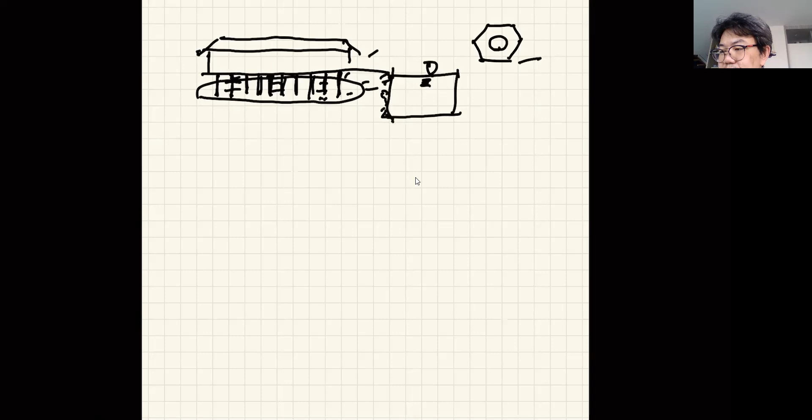But technically, this house will not sit on a solid foundation. It just floats on clay. But this clay has been made strong enough by a series of piles driven into it. I have a house like this. It was built 50, 60 years ago and sits on the shallow foundation, wooden piles like this. And you know what happened? At the back of my house, there used to be a water pond, and this is the soil. When you have a water pond with the soil like this, the water would come in like this. The water level in the ground would be something like this.

And then one day, this is my house, and we have a wall here, the guy who owned this pool decided to make it into a concrete pool. So they made it a solid pool. That means the water level in the ground disappeared. When water goes away, the soil condition here changes. So I have a problem with the house because when the water is gone, the clay here loses its strength. So some of the piles at the back of the house went down. So I got a settlement problem.

Generally, if you have a settlement problem, you can jack up the house and reconstruct your foundation. But this house is so old. In fact, the entire house sits on the shallow foundation, so there's no way to jack it up. It's very funny because we have a structural engineer in the house, and we have a settlement problem that the structural engineer cannot do anything about. So we have to let it rot. This used to be my bedroom with 2 kids, and the settlement is so visible, the doors became stuck, couldn't open because the rotation is so visible. Yet we still lived in it, but now we got a new house, so we're happy.

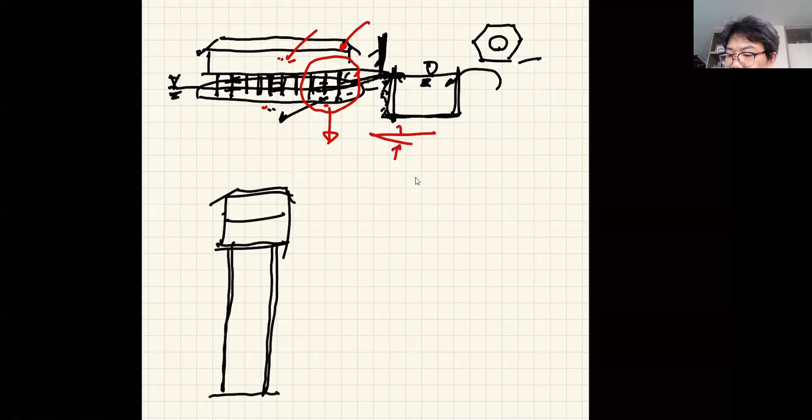Now, in general, for a typical house now in Bangkok, let's make it like a 2-story house, they don't do this anymore because we have the technology. The foundation is a deep foundation nowadays, so that the weight of the house is sent to a more solid datum line. Generally, this is about minus 21 meters from ground level in Bangkok. This is where we find the first solid level that we can drive the pile down to and let the piles sit on this solid ground.

I don't know what it's called because I'm not the soil mechanics guy. Never was, never am, never will be.

But this is what we do nowadays. So it's a completely different animal. Now our structure sits firmly on the firm soil level. So when you guys want to build your little kitchen, maybe here, generally the area will be limited. What many people do when they want their house expanded is build this on the ground right away, sometimes without foundation, sometimes with shallow foundation. And what they always do is attach this new structure to the house.

So imagine this one is sitting on nothing and your house is sitting on the deep foundation. This entire new thing can pull the house down because the house is not designed to hang on to something like this.

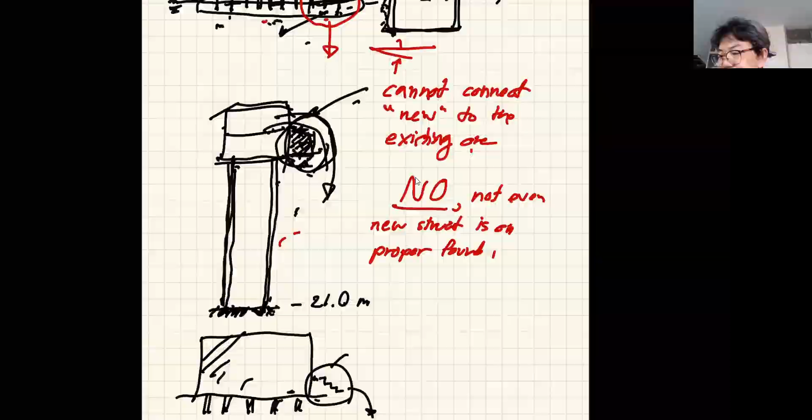Any questions, guys? Hello? Are you with me? Hello? No question. So let's move on to the next problem. Okay. No question, right? Okay, fine. So let's move on to the next example.

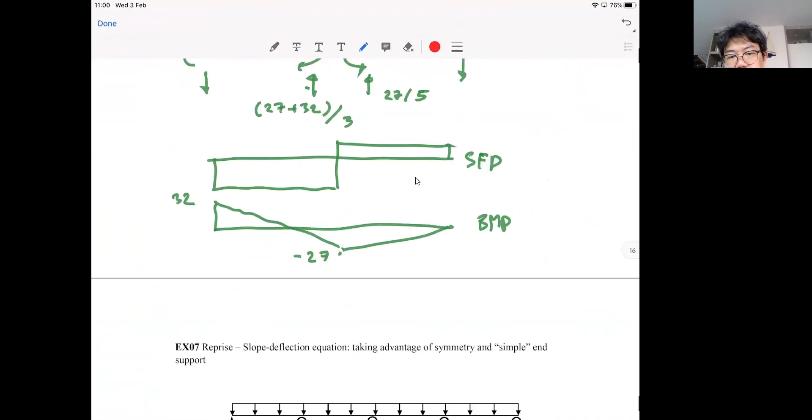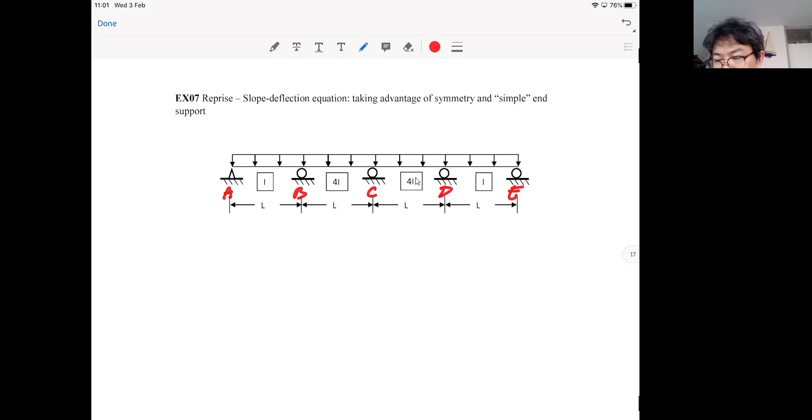Now we are going to deal with this thing, and it is something that you must know and must be able to take advantage of. Let's take a look at this problem. Okay, you see, even with the slope deflection equation, the very powerful method to solve it, it is always nice to recognize the fact that, let's say this is A, B, C, D, E. Now the structure is symmetric. When it is symmetric, it means that you have the line of symmetry like this. And when you have a symmetric structure, it means that both the structure and the loading condition must be symmetric.

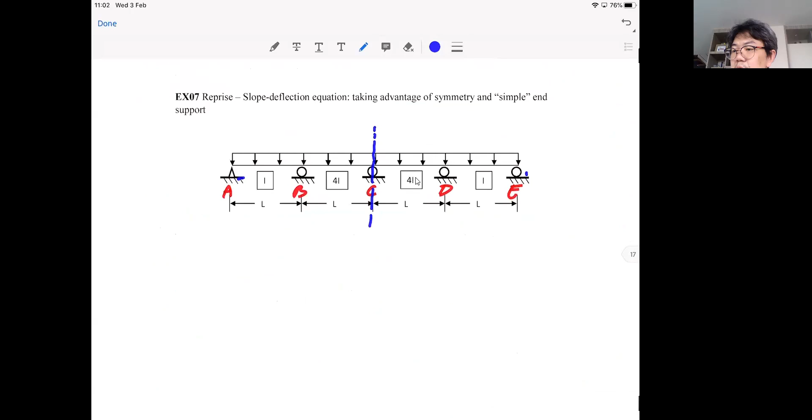Okay, so in this case, we have a symmetric structure, even though this is a hinge and this is a roller, but we ignore the axial deformation, remember? We shouldn't have a problem with that. So it can be considered symmetric. And when the structure is symmetric, that is something that you can tell right away. And not only that, in this case, we know that when we have a support like this, the moment at A must always be equal to 0. So when you have a structure like this, you know that here your MA must be 0. Do you agree with me or not? It can't be anything else, right?

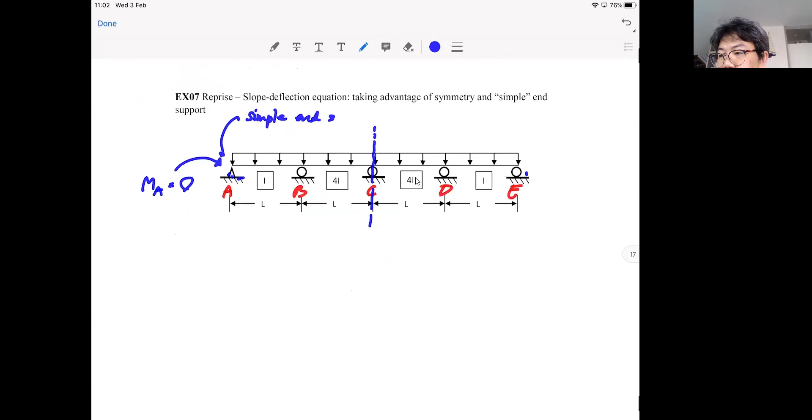Because this is a simple support at the end of your indeterminate structure. So we call this a simple end support. So when we have this situation, we know right away that MA is equal to 0. So it seems a bit silly to try to set up the equation MA equal to 0 and try to solve it. And likewise, we know that ME here is 0 as well because it is a simple end support.

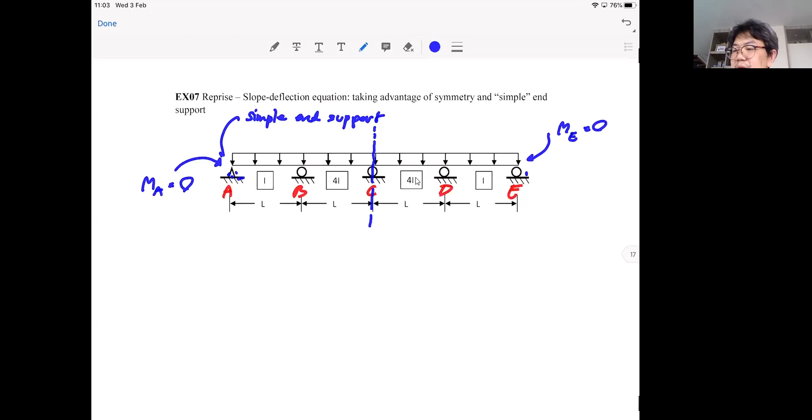Okay, before I proceed with this one, I recall that we had a previous issue with this one. Right, so excuse me. Could we go back to this example?

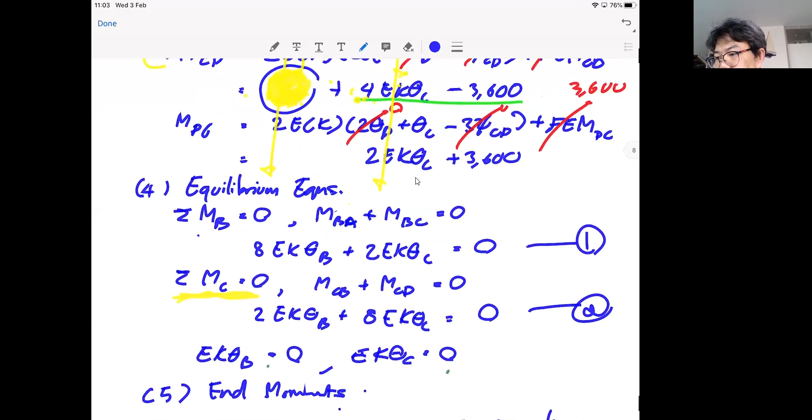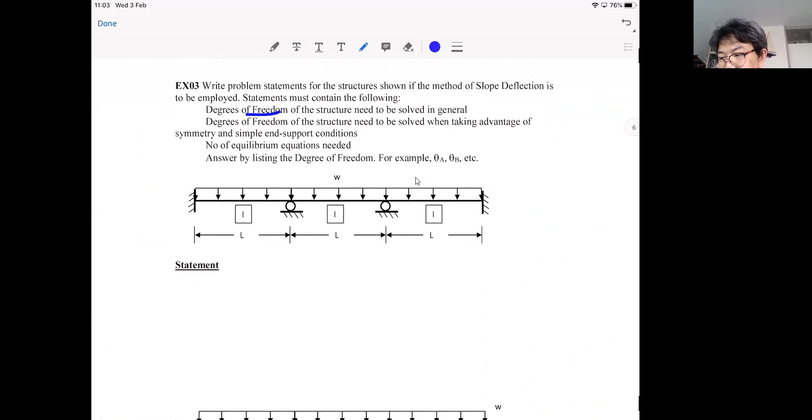Remember example number 4. Okay, and then to try to facilitate this, I will go back to example number 3. Okay, guys, it's cleaner. So are you with me? Are you with example number 3 now? Yes. Okay, thank you for your response.

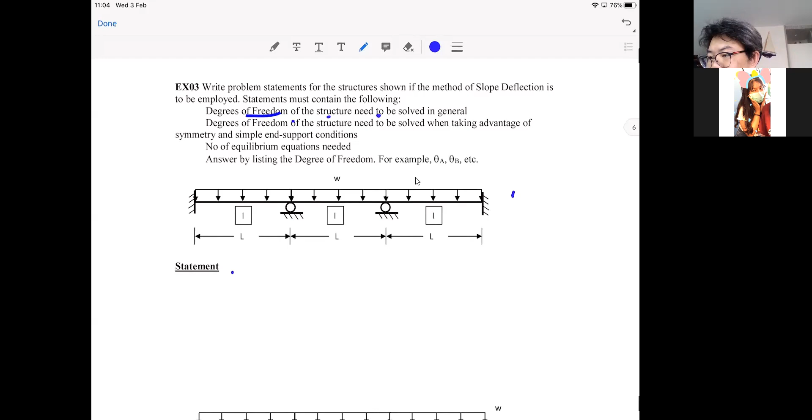Much appreciated. Now, in this problem, we can identify the degrees of freedom that you need to solve. I'm going to have this kind of question to measure whether or not you can identify your unknowns in the exam. So you need to make a statement: the degrees of freedom of the structure that need to be solved in general. In this case, if I have A, B, C, and D, the first statement is that the degrees of freedom of the structure that need to be solved would be theta B and theta C, right?

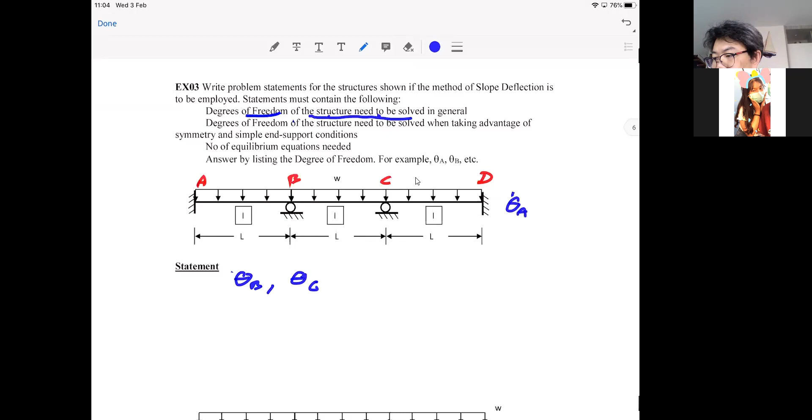You know your theta A and theta D are 0, so you know the value, you don't need to solve them. So in general, the unknowns that you need to solve are theta B and theta C. So move on to the second one: when you can take advantage of symmetry. You now know that this structure is symmetric, correct? Because of the same length, same moment of inertia, and same loading. Now, the line of symmetry is right in the middle of the second member.

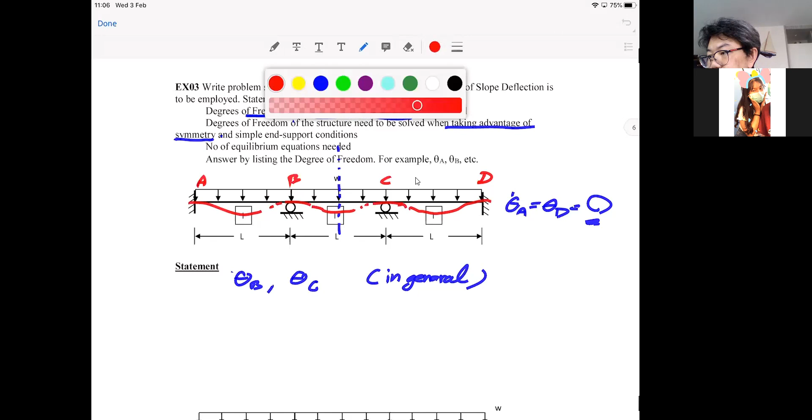So when you have a symmetric structure, it means that the deflected shape should be symmetric, right? So this is negative curvature, this is negative curvature, and that, and that. When you have a curvature that looks like this, look at theta B. Let's use a different color. Theta B is clockwise. If this picture is symmetric, how would theta C be related to theta B? Most of you will say the rotation must be the same, but look more carefully.

Symmetric means it's like a mirror image. You can fold the two together about the line of symmetry, correct? So if you fold these two pictures to become one about this axis, theta C must be in this direction. So if you realize that the problem is symmetric, you will know that theta B is equal to minus theta C. Otherwise, it's not symmetric. So when taking advantage of symmetry, 2 degrees of freedom here become 1 degree of freedom, because you know that theta B is equal to minus theta C.

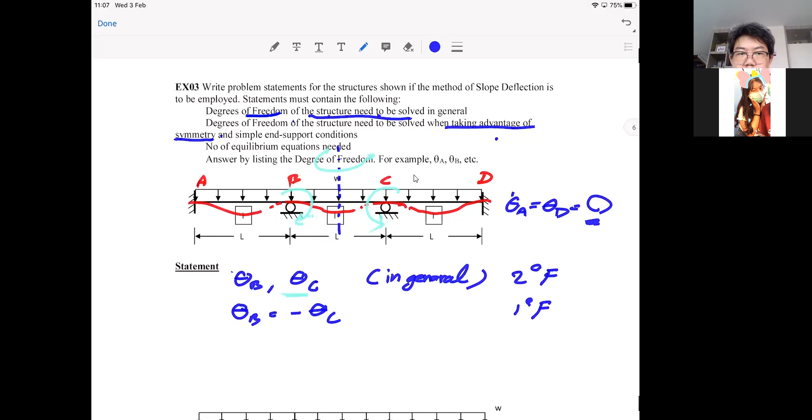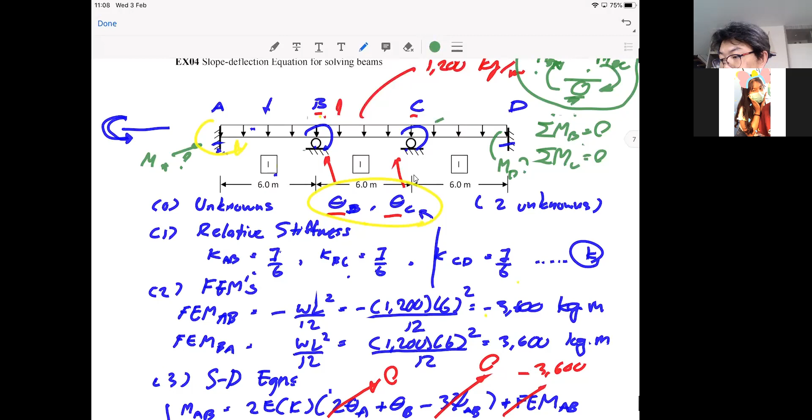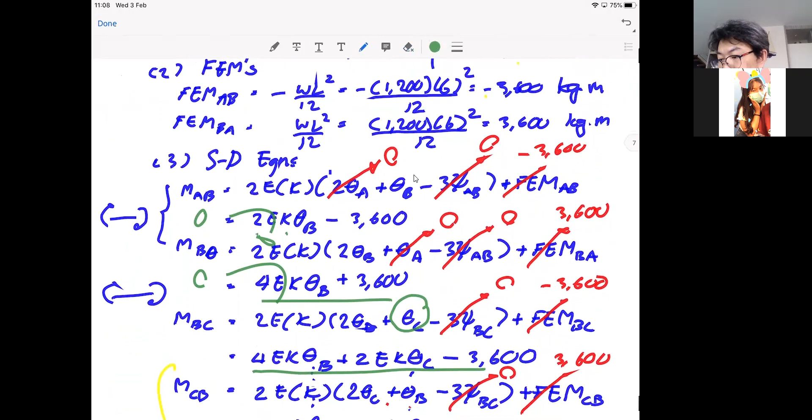So let's come back to this example. Like I told you, the first time we solved this one, I wanted to carry out the whole thing and solve everything for you. In fact, I could begin by saying that theta C is equal to minus theta B from the beginning. Let's use a different color. Theta C is equal to minus theta B, and I can plug it in here. Oops, sorry. So this problem becomes one unknown and one equation, because theta C equals minus theta B. You only need one equation, because these two equations become the same. So one equation, then done.

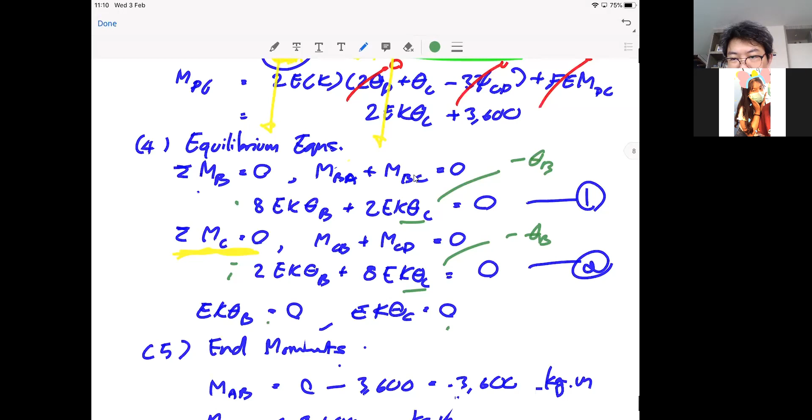So when you have symmetry and you can take advantage of that, your work will be reduced by at least 50%. I strongly encourage all of you to feel the structure, feel the symmetry, and always take advantage of the situation. Because first of all, good engineers work smart, quickly and correctly. By taking advantage of symmetry, you reduce your work. You work more quickly, and with reduced work, you are less likely to make mistakes. And working more quickly saves energy you can spend doing something else.

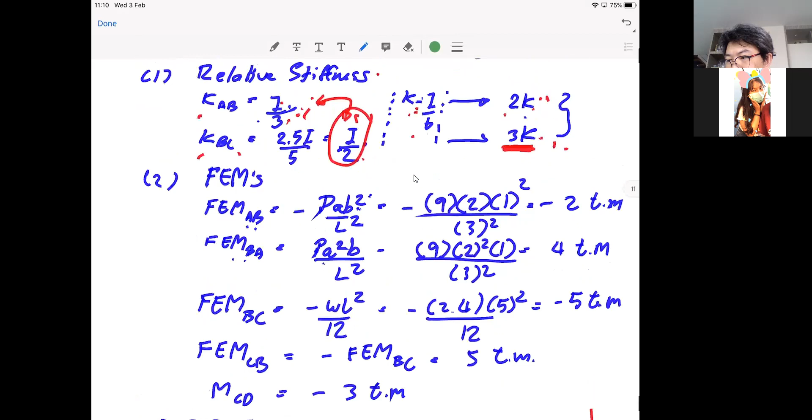That's the first reason. The second is that a structure like this is very, very common. When you design continuous beams, in RC, in steel design, it's so common to have a symmetric structure like this. And good experienced engineers can design a beam like this in less than 5 minutes. I'm not saying this to discourage you. I'm saying this to inspire you that one day you should be able to design things like this in 5 minutes.

You are in front of the construction and somebody wants to change the beam, and you say, hey, wait a minute, let me recalculate, and you do it in 5 minutes. How cool is that? Imagine someone who doesn't understand the behavior of the structure: can I go back to my office and turn on the program so I can analyze the structure accurately using a computer? And then they mess up the input and get the wrong answers.

Okay? If being an engineer is all about using the computer program, my kids can be engineers now, because they can turn on computers, they can use programs, they can use applications. There's no point for you guys to study anything, right? Engineers are much more than using computers.

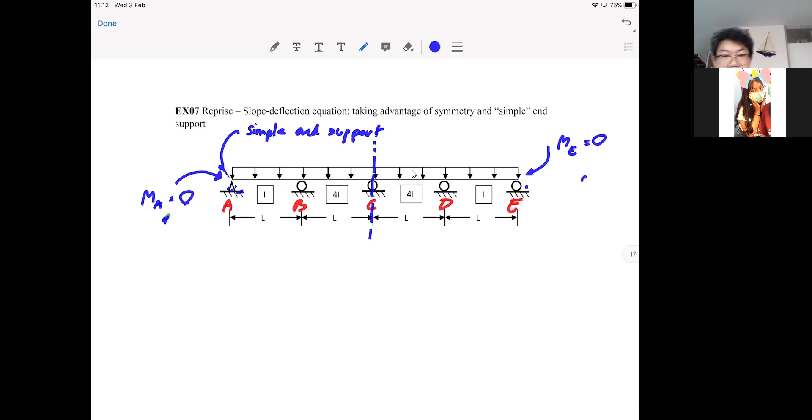So let's say I can use this. Let's say we have our structure. This is continuous, and we are now focused on this support. Remember, it has to be the end support, and it has to be either the hinge or the roller. So this is called simple end support.

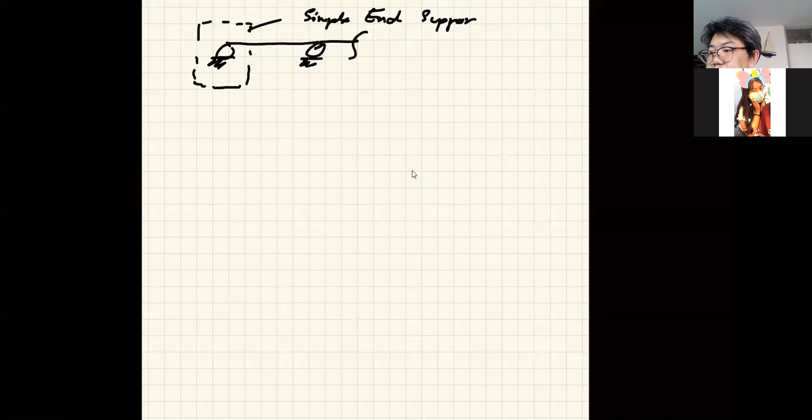See, that word comes first. It has to be support at the end, and it has to be simple support. Many students got confused with this, and I feel kind of sorry when they want to do this and they mess it up. It has to be end support. It has to be a simple support. Okay, let's call this one I.

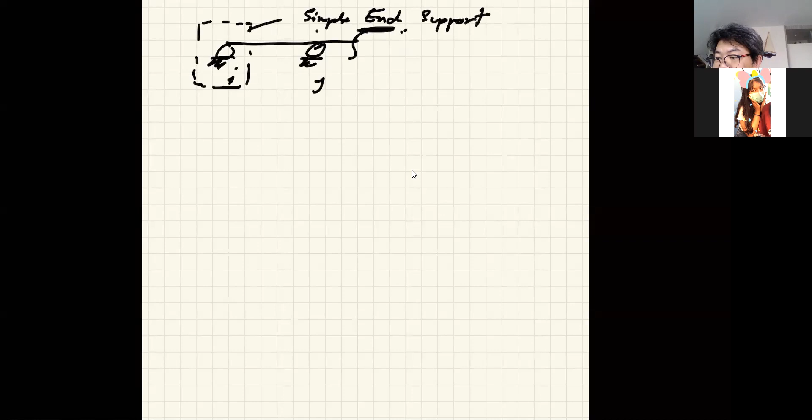This one J. We can write our slope deflection equation: Mij equals 2EK times 2 theta I plus theta J, and let's include this psi term as well, minus psi ij, plus FEMij. And then you have Mji equals 2EK times 2 theta J plus theta I minus psi ij, plus FEMji. Now I already know that my Mij is 0.

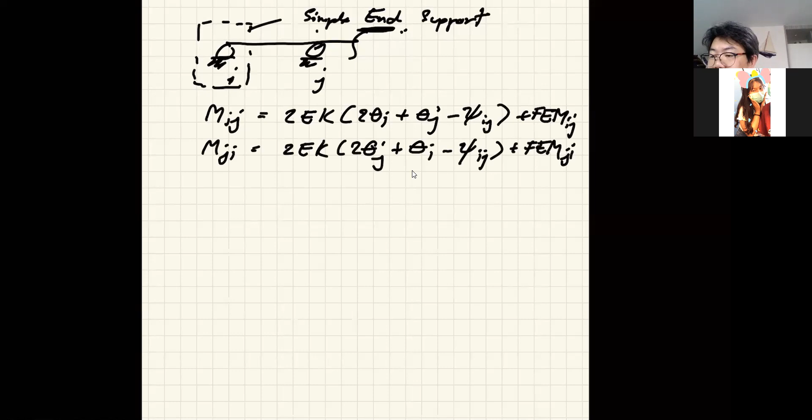This is 0. So I can take advantage of knowing this value, and I will try to eliminate theta I by using these two equations. So I can just multiply the second equation by 2, and then take 2Mji minus Mij. If I do this, I can eliminate theta I, and therefore I have Mji. Remember, we don't need Mij because we know it's 0.

By doing this, we have Mji equals 3EK times theta J minus psi ij, plus FEMji minus FEMij over 2. So this is the modification that when you use this, you don't have to bother to account for theta I. And you don't have to do anything to calculate Mij because you know Mij is 0.

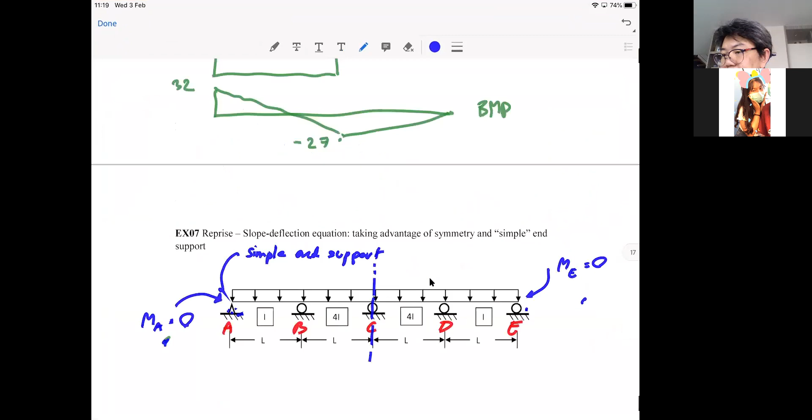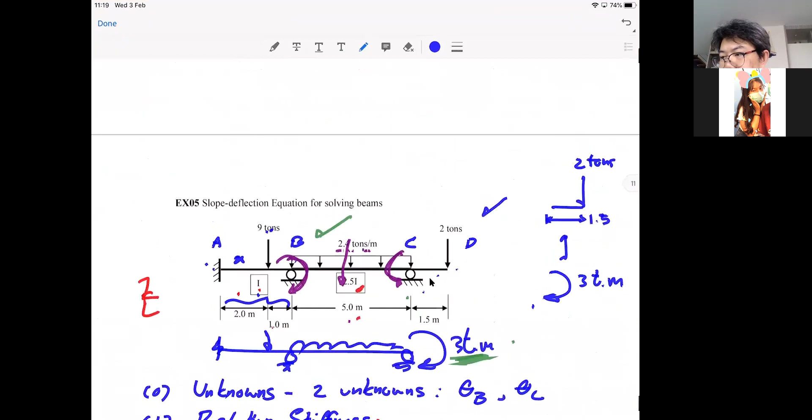All right, so let's go back to, oops, no, not this one, sorry, my mistake. Let's go back to this and scroll back to problem number 2. Takes forever to get there. Oh, not it. 3, I'm sorry, not 2.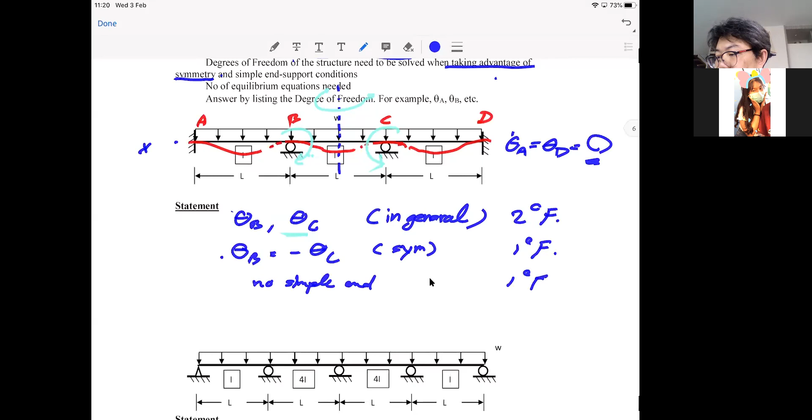Okay, so when you look at this problem and you try to make a statement, we don't have a simple end support in this first case, correct? No simple end support because your end supports are fixed. So taking advantage of symmetry, you can reduce your unknowns from 2 to 1 because you know that theta B is equal to minus theta C. But there's no simple end support, so it remains 1 degree of freedom. Now take a look at this one.

Now we have support A, B, C, D, and E. Okay, so that means in general, your unknowns are 1, 2, 3, 4, 5, right? Theta A, theta B, theta C, theta D, and theta E. So in general, you have 5 degrees of freedom.

So let's say you are very confident of your slope deflection equation knowledge, but you're not so confident about your modification. You will have to solve this structure by coming up with 5 equilibrium equations. Not nice, okay? But again, my instructor says something about symmetry.

So that means I know that my structure will deform like this, perhaps. This is a simple end, so the rotation comes out like this right away, and then the negative moment here, and then perhaps positive, and then comes back to here. So because the loading condition is symmetric and the structure is symmetric, right? So from this, we can say that,

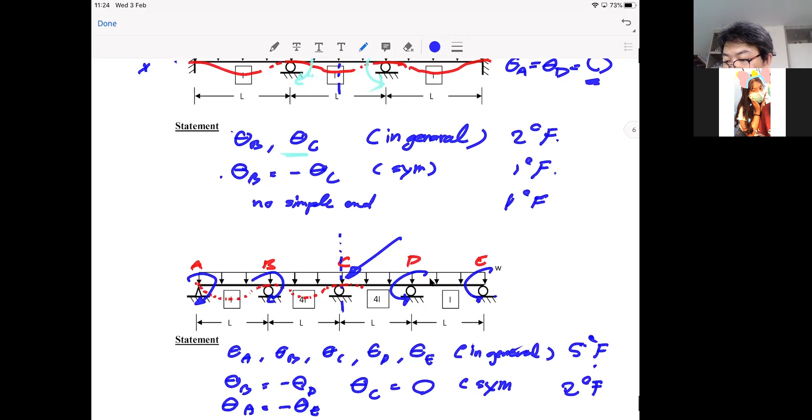So one more thing I forgot. That is theta A is also equal to minus theta E, right? So 1, 2, 3. So now you have 2 degrees of freedom left. That is A and B. But wait a minute. We have simple end support as well, right? A is end support and it is also a simple support. So that means you already know that MA is 0 and likewise for ME because it's symmetric.

So if you use your modified equation that I just showed you, it means that you don't need to solve for theta A. How about that? Do you like that? So that means with simple end support you can eliminate theta A. Eliminate it. Theta A is not 0. Theta A is not 0, but it can be eliminated.

So by taking advantage of simple end plus symmetry, you are down to 1 degree of freedom that you need to solve. See, from 5 to 1. From 5 equations to 1 equation. What's not to like about it? Right? Questions?

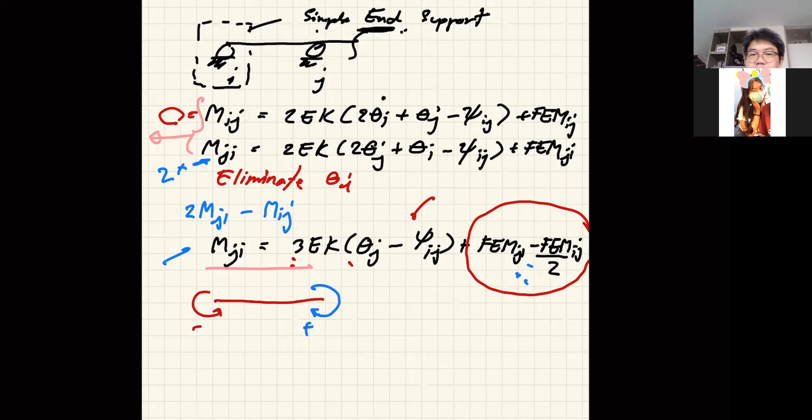chances are you may use computer more often than hand calculation, but you need to understand the behavior of the structure first. And the beauty of slope deflection is that it allows you to see it. And sometimes with a simple structure, it is a lot easier than to use the computer and then try to create the model, put a load on it, and so on. So it's quick and efficient when you have a symmetric structure like that. Very, very quick. Okay, so if you don't have any question, let's try to work our way with this example.

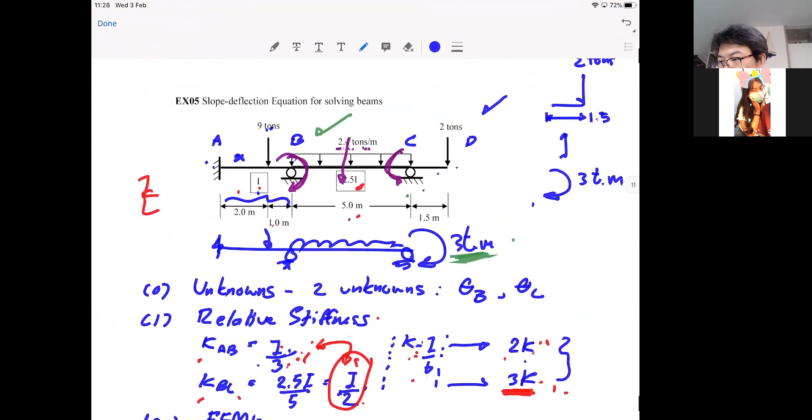And then, I think some of you may have a way to mess step number 0 up very badly. And it makes my job very difficult when I try to grade your work. I think you don't do it intentionally in a way, but you mess it up because you don't have a clear picture on what you are doing. That's why you mess it up.

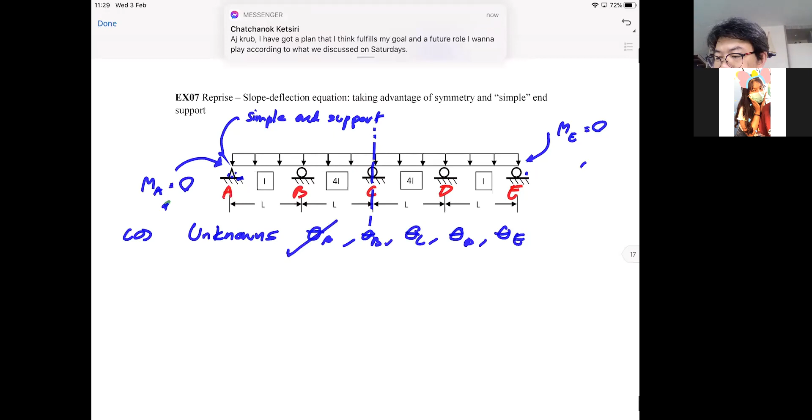So generally, if this is the case, you can say theta A is eliminated because we can take advantage of a simple end support, and theta E, simple end. Theta C is 0 because of symmetry. And then theta B is equal to minus theta D. So we're good to go, right? I don't have any numbers to work with. It doesn't matter. So what's step number 1? Oh, okay. Step number 1, relative stiffness.

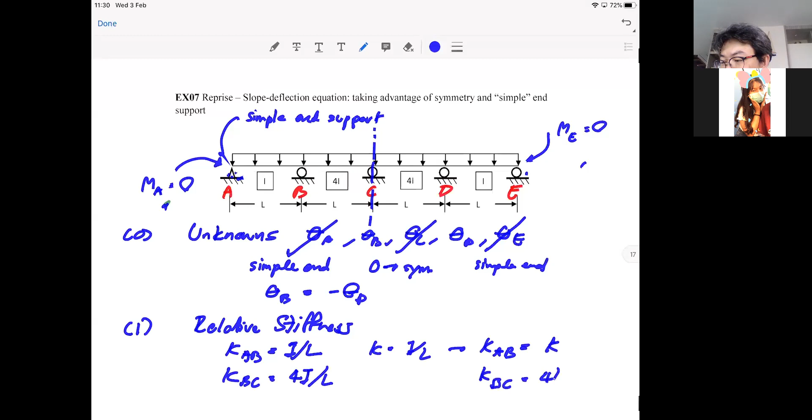So you now have KAB is equal to I over L. KBC is 4I over L. So let's say my K is equal to I over L. So my KAB is therefore K, and my KBC is 4K, right? Simple enough. And because I don't have any number with me, and if I ask some number from you, it may take forever. So let's just say FEMs.

FEM AB is going to be equal to FEM BC equal to FEM CD equal to FEM DE, equal to minus FEM BA equal to minus FEM CB equal to minus FEM DC equal to minus FEM ED, and this is of course WL square over 12. All right.

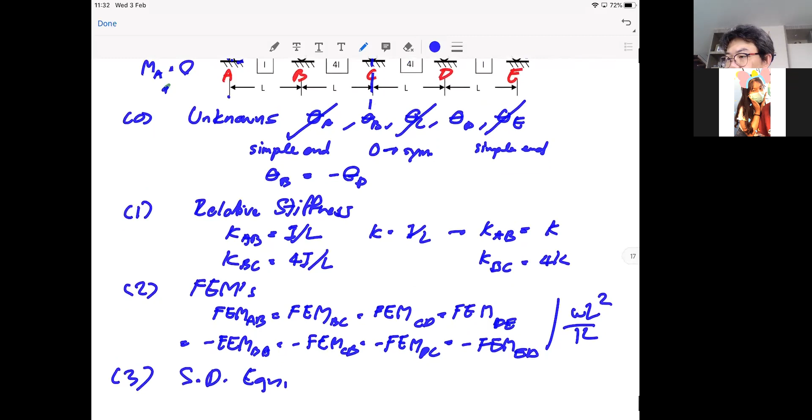So step number 3 now, slope deflection equation. So when I realize that I'm going to take advantage of the fact that support A is simple end to eliminate the need to solve theta A, I am now obliged to write MBA with the modified equation. Correct? Now, where is my equation? I may remember it, but just to make sure that no mistake is made. Okay. This screen, wrong screen.

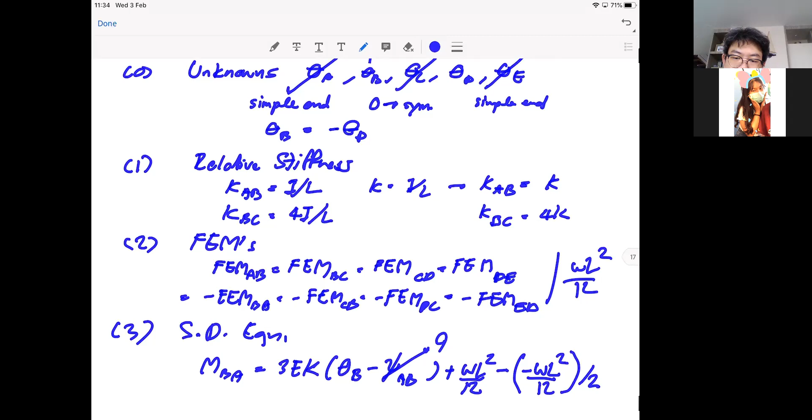3K, just K, right? Because that's member AB. Theta B minus psi AB, which is 0. And then plus FEM BA, which is WL square over 12, right? Minus FEM AB, which is in fact minus of this, minus WL square over 12. And don't forget that we have to divide this by 2. So that is MBA.

And let's say, because I just make things up, I don't have anything with me, so I may make a mistake. If that's the case, please remind me as well. 3EK theta B plus, that becomes WL squared over 8, right? You have 1/12 plus 1/24, right? So it's 2/24, 3/24 becomes WL squared over 8. So that's your MBA.

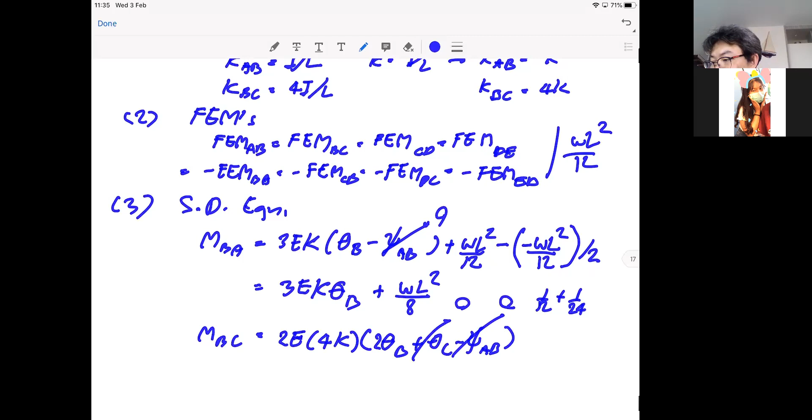And then I can go on and write my MBC. MBC is a typical span now. So the typical equation, 2E 4K, remember? 2 theta B plus theta C minus psi. This term is 0. That is 0. And then you will realize that FEM BC is minus WL squared over 12. Okay, so here we are.

Because we have only one unknown, we can proceed to step number 4 to construct equilibrium equation, which is sigma MB equal to 0, that is MBA plus MBC is 0. So one equation, one unknown, your theta B will come out in no time. I forgot to complete this, so that's 16EK theta B minus that term. So in fact, we have 19EK theta B, so that's 8 and 12, that's 24 again, 3/24. So that means plus WL squared over 24 equal to 0. How do you like that? One equation, one unknown. So you're done, right?

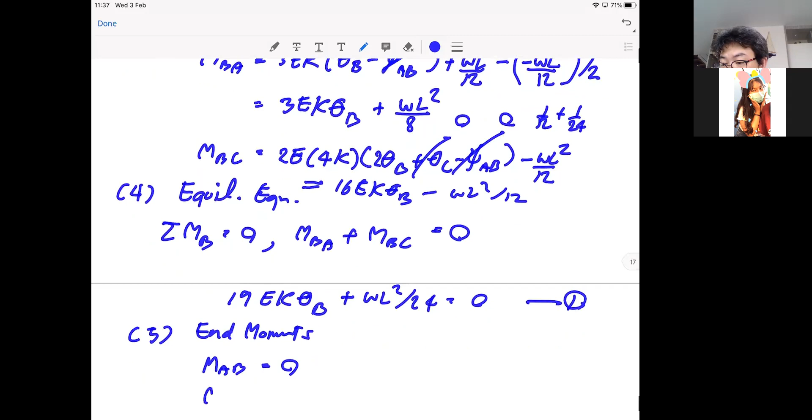So now you must realize the fact that you don't have any other equations. So how do you solve others? You need to write other necessary equations to get your end moments. So MAB is 0, right? No need to do that. Silly. MBA, you already have that equation. MBC, you already have the equation. What about MCB? Many would think that MCB is 0, but no. You can calculate this by writing the equation. 4K and then theta B, right? Plus WL squared over 12. That's MCB. And voila, your job is done.

Again, I say that word a lot and I'm beginning to hate it, but it's true that it's not rocket science to take advantage of symmetry and simple end. If you do that, it helps reduce your work dramatically and it helps reduce your error as well. And you see, I can be tricky at times, so I always give a problem like this. So you have one of the two ways to tackle it. The first is try to understand the behavior of the structure, take advantage of everything that is available to you, or simply go head on into the problem and try to solve 5 unknowns, which if you get it right, you may feel silly in the end.

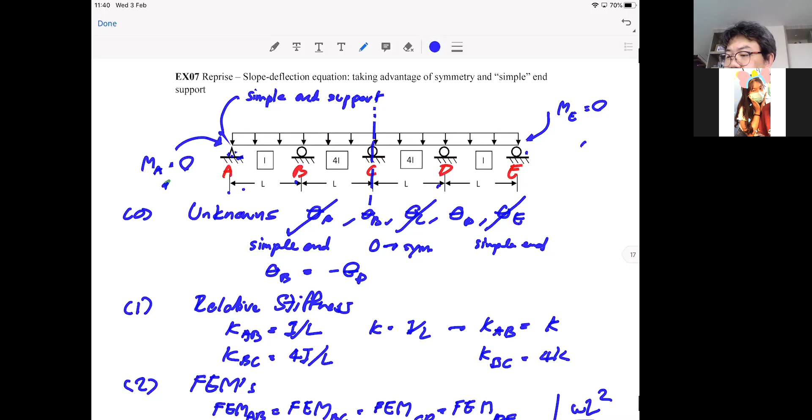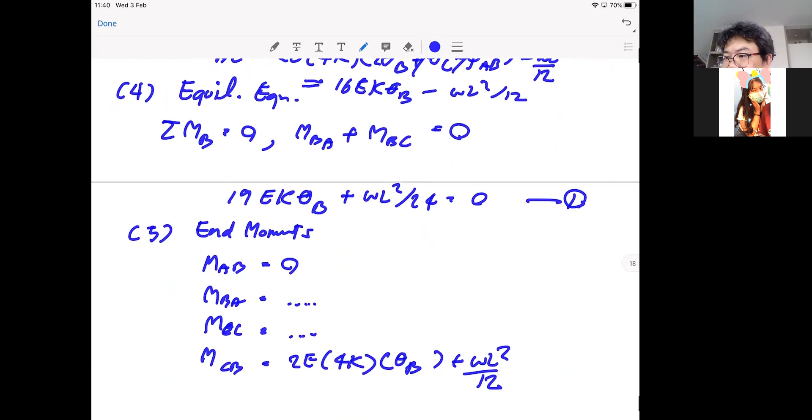Is there any question? Question? No question, I suppose. No question. You want me to move anywhere? You guys are taking photo of something? Should I stop here? Or should I stop here?